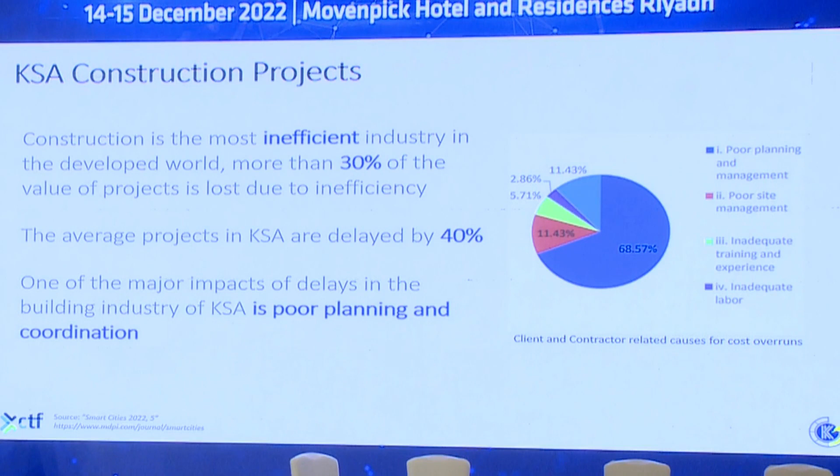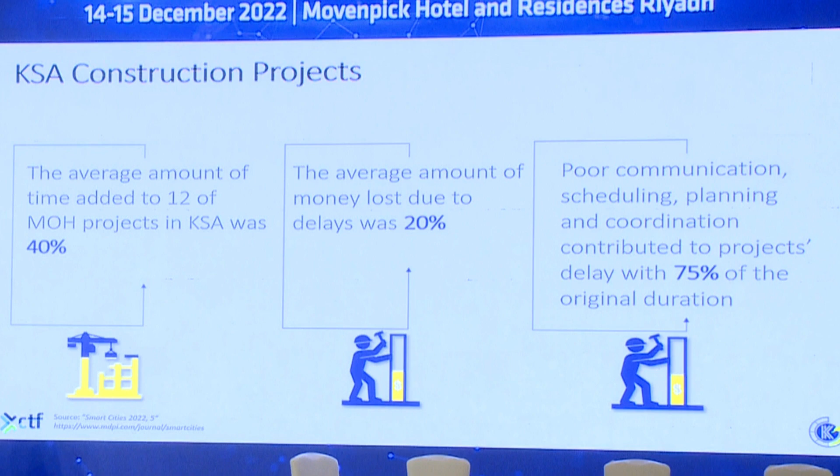According to a study of 47 KSA construction projects in 2022 and 12 MOH projects, rework activities caused delays of almost 40% and money losses of 20%. The major causes of such delays are poor planning, coordination, scheduling, and communication, which contributed to project delays of 75% of the original duration. We are working in a highly fragmented industry, broken down into planning, design, construction, and operations.

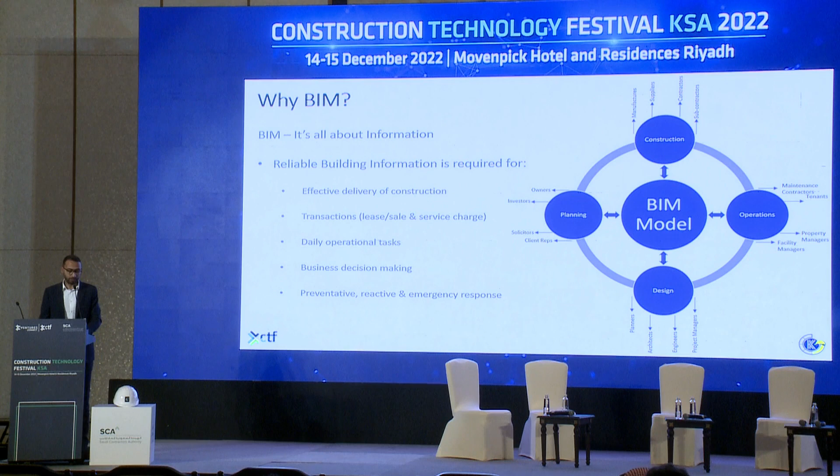And so many project stakeholders are involved in the project with different business interests, which ends up creating a complicated series of transactions of information between all the parties during the project stages, to the point that the collective knowledge of the building information being produced is almost impossible to get, because it is stored in different locations, different companies, different countries, and sometimes in people's minds. This is why the ultimate goal of BIM implementation processes is to describe one building by one database of information.

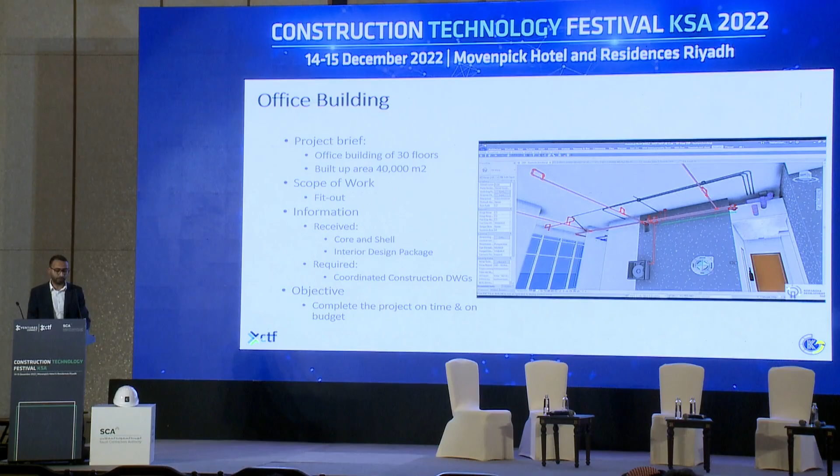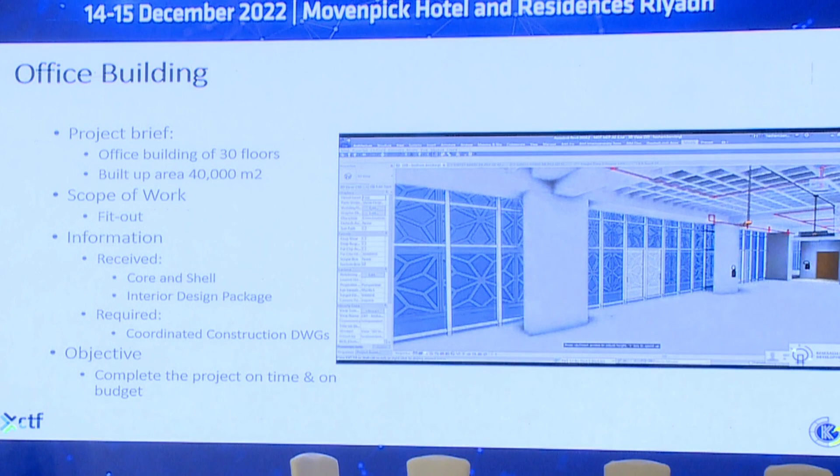The first case study is an office building for one of the ministries in Riyadh. It consists of 30 floors with a total built-up area of 40,000 square meters. The main scope for our company is to do the fit-out works. As a contractor, it's our responsibility to verify the as-built received from the client. We used to do such verification the traditional way: visual inspection on site, take site measurements, update the drawings, check specs, and move forward to the execution phase. However, such methodology puts the project at risk of rework and delays because of human error and the information transactions.

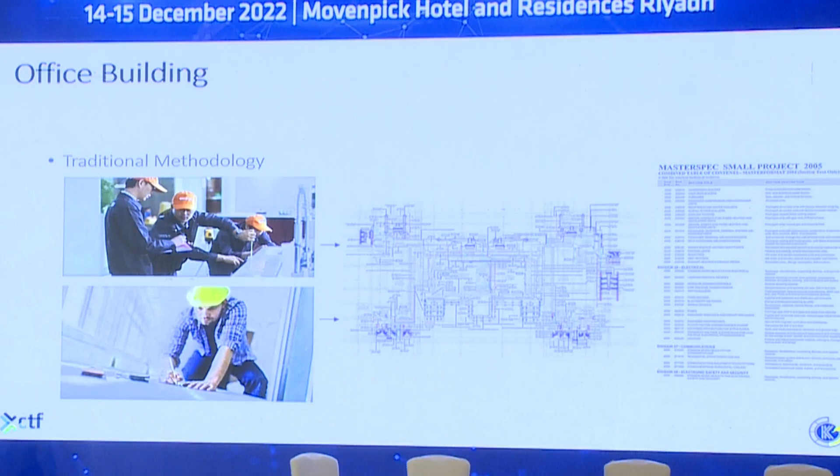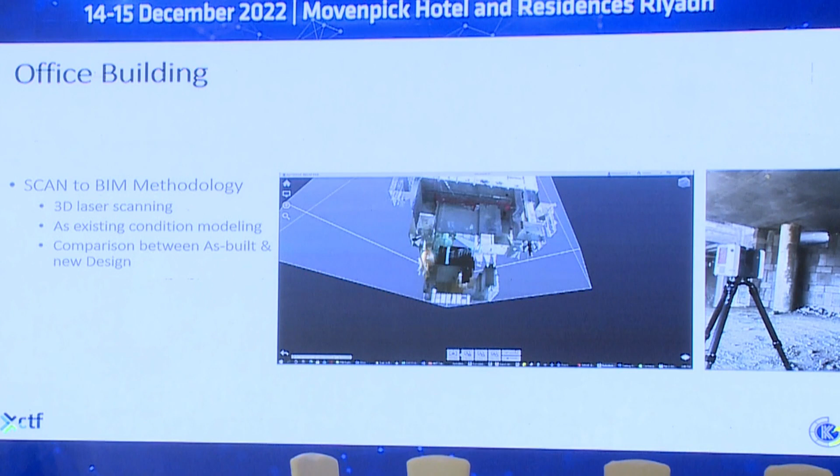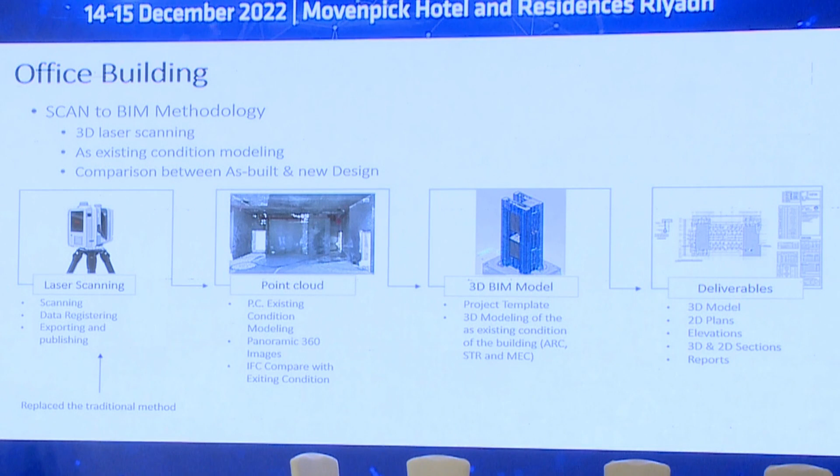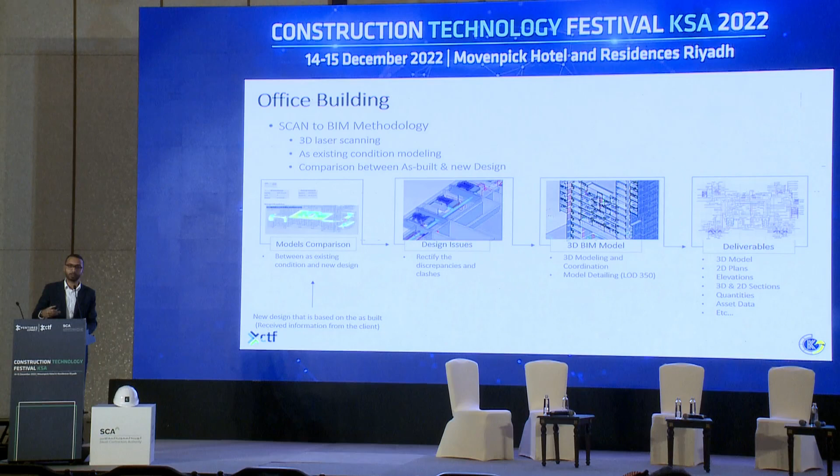The other methodology that we followed is 3D laser scanning, or the scan-to-BIM methodology, in which we conducted 3D laser scanning for the entire building. We utilized the 3D point cloud model and the panoramic images to create a 3D BIM model of the as-existing condition of the building for all disciplines: architecture, structure, mechanical, followed by a comparison between the as-built that we received from the client and the as-existing condition package extracted from the 3D laser scanning.

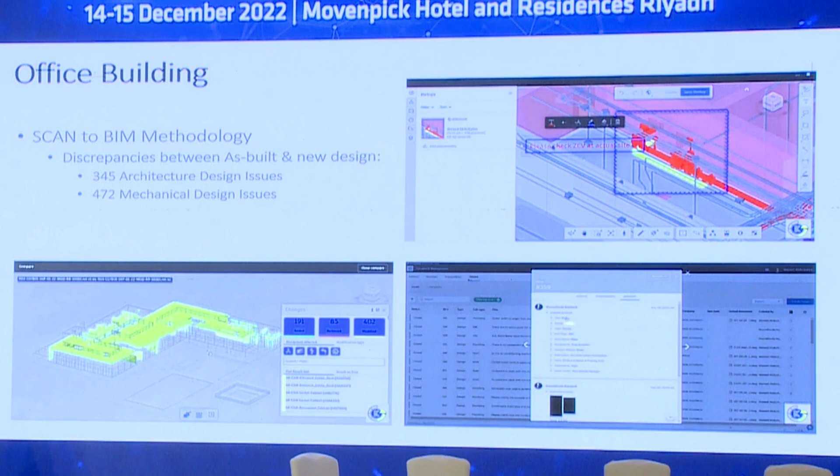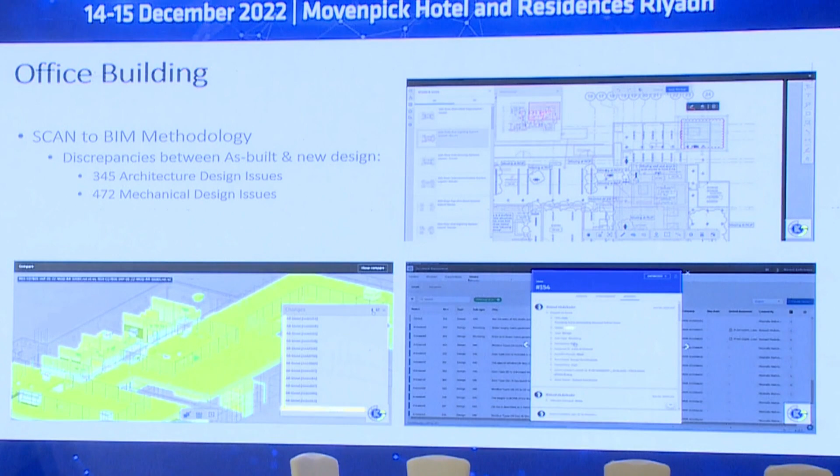We found many discrepancies, and we were able to identify almost 345 architecture design issues and 472 mechanical design issues. Such issues were communicated and coordinated with the client and designer early on through our common data environment, where we managed to connect all the project stakeholders in one single platform. Compared with the traditional methodology, we managed to reduce the rework activities by 26% of the original time. Coordination was enhanced, communication was enhanced, and all the issues were resolved early on.

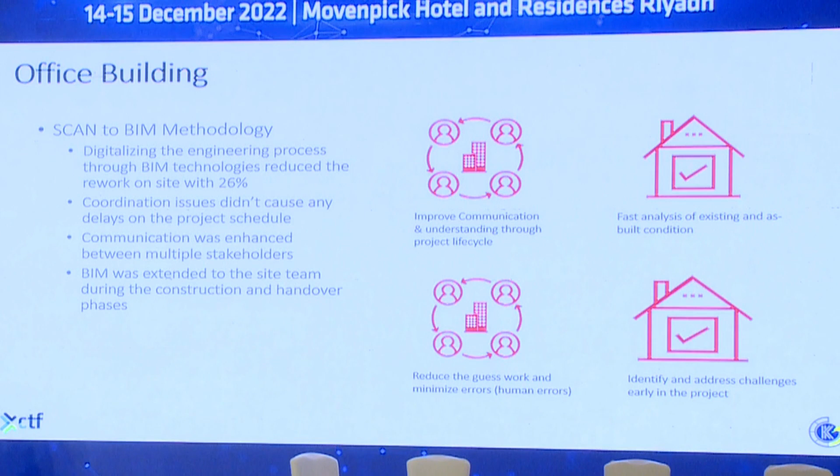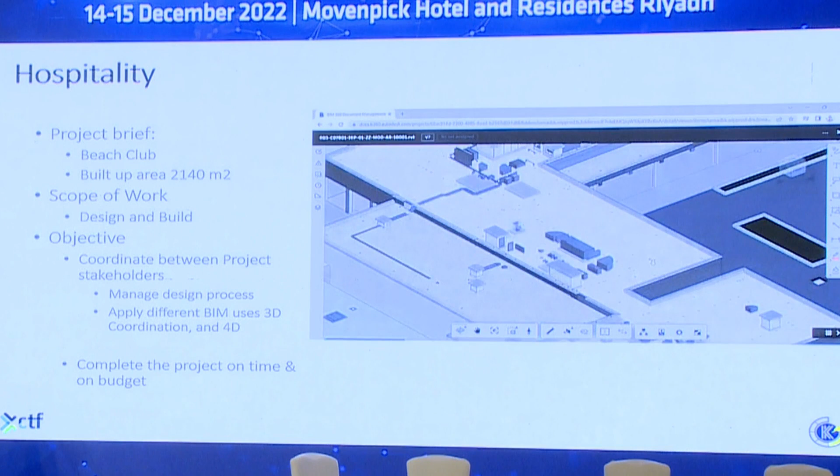The second case study is a hospitality project where the scope of work was a complete design and build project. During the tendering phase, the client requested us to construct the project under the BIM process, which is the optimum scenario for us as a contractor, to have a single platform that connects all the project stakeholders together.

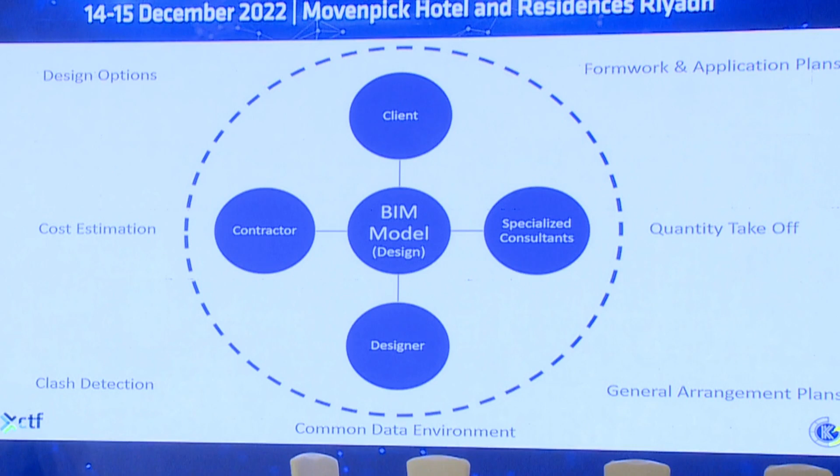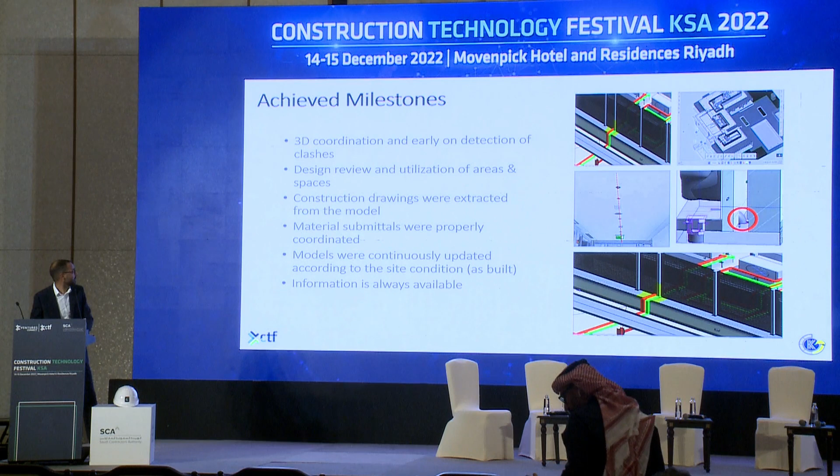When we connect all the project stakeholders together, we were able to carry on with the project phases and activities later on. In this project, we achieved different milestones. 3D coordination activity or milestone was conducted early on during the design phase. Design review and utilization of areas and spaces. Construction drawings and schedules, BOQs, were extracted directly from the models. Models have information always available.

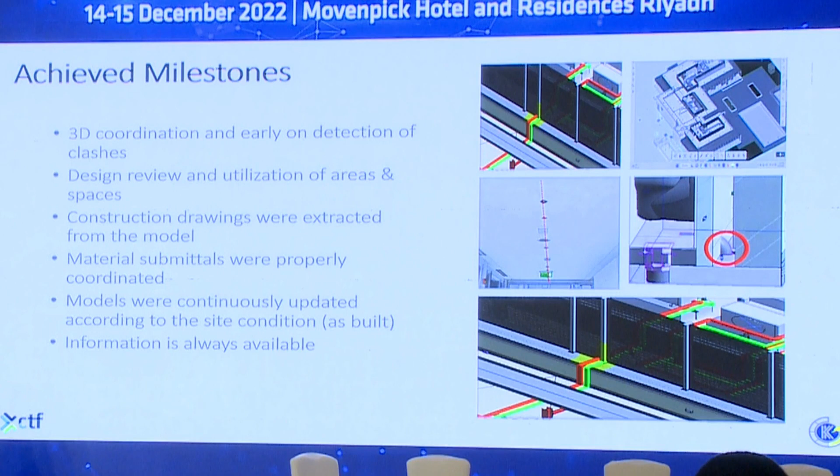And the most important milestone for us was the material submittals and long lead items. This was one of the major points for us that caused delays and rework activities in our previous projects. We faced many challenges in this project. The major one is the supply chain that caused us a lot of rework activities.

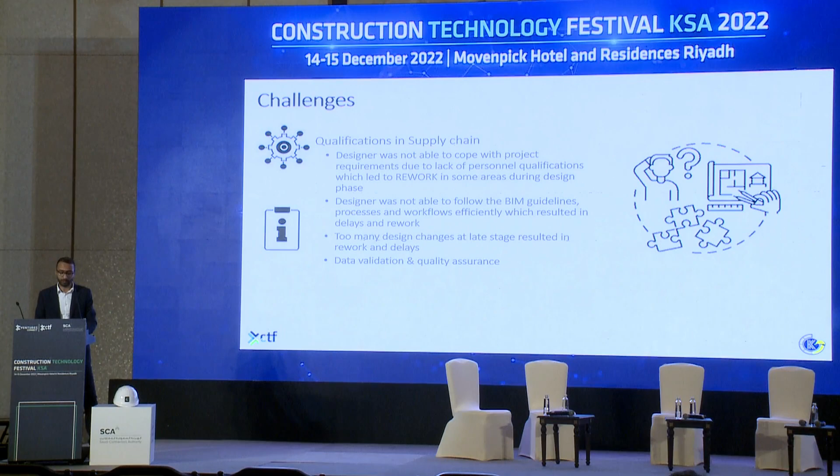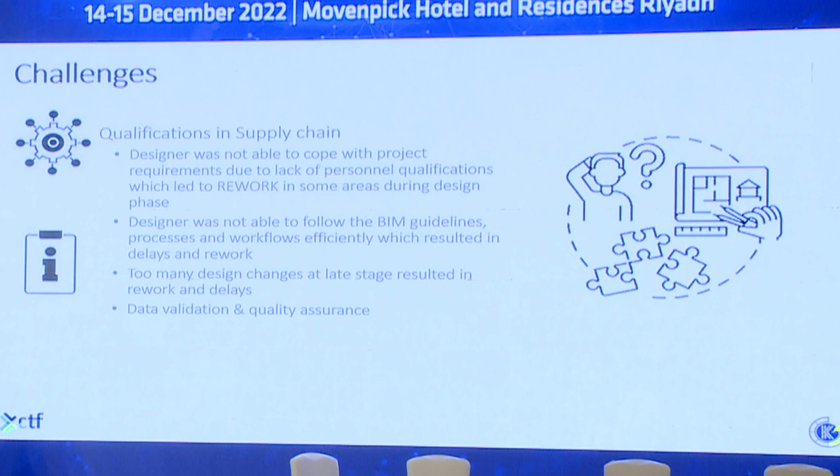Unfortunately, the designer had lack of personnel qualification to meet the project requirements and to follow the project BIM standards and processes. Also, accordingly, the client had also many design changes at late stage of the project, which resulted in rework and stretched the project timeframe.

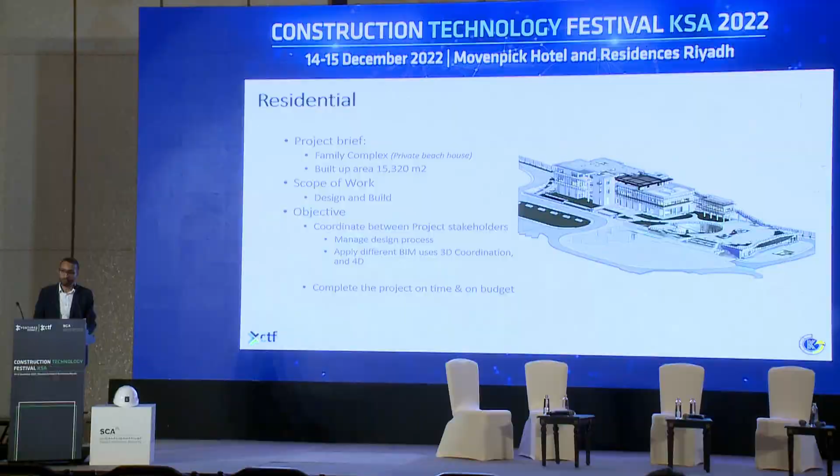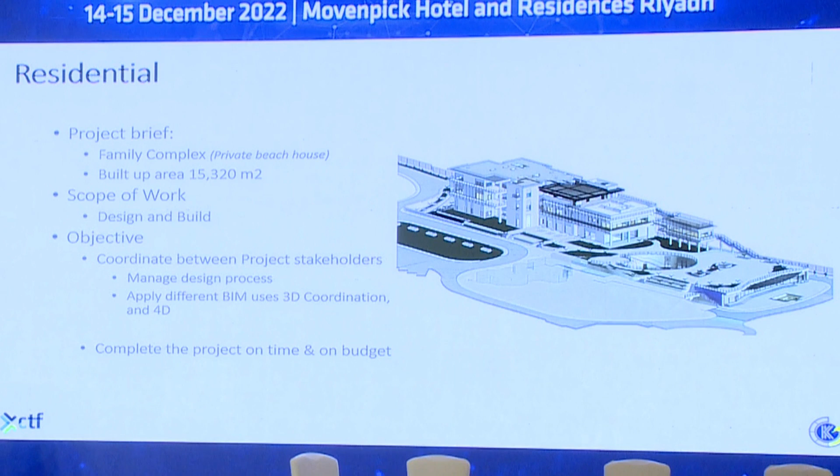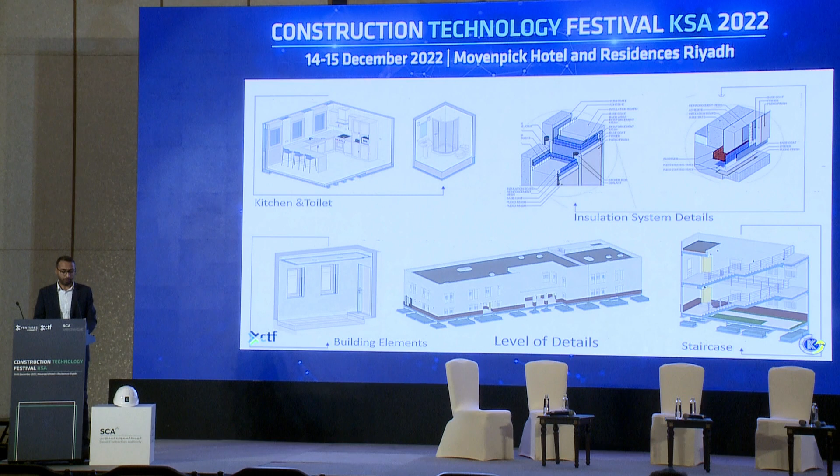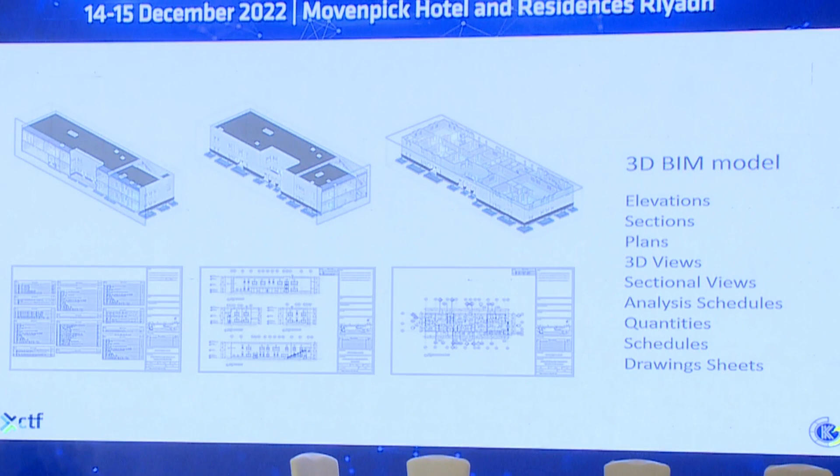The third case study is a private residential beach house project with built-up area of 15,000 square meters. The client suffered almost 18 months of rework in design stage, because of the loss of information or the lack of coordination. BIM was introduced during the design. We implemented and solved almost 345 design issues for all disciplines. We managed to build a 3D BIM model with the required level of details needed to ensure that the model is mature enough to produce a comprehensive, complete set of design package, fully coordinated.

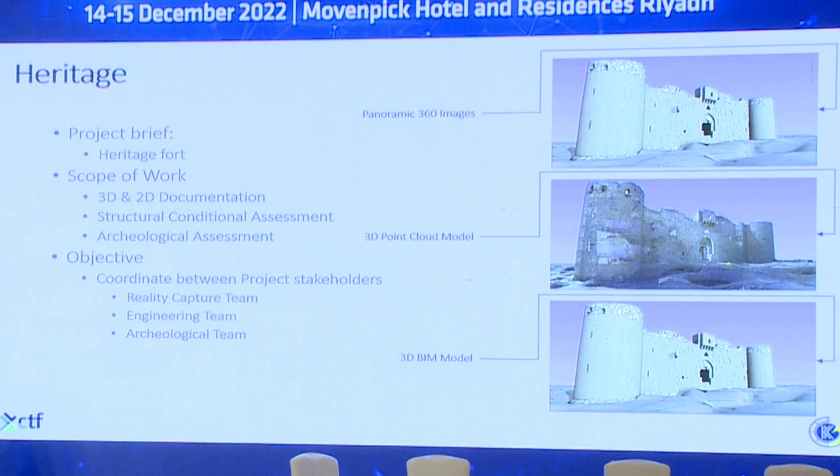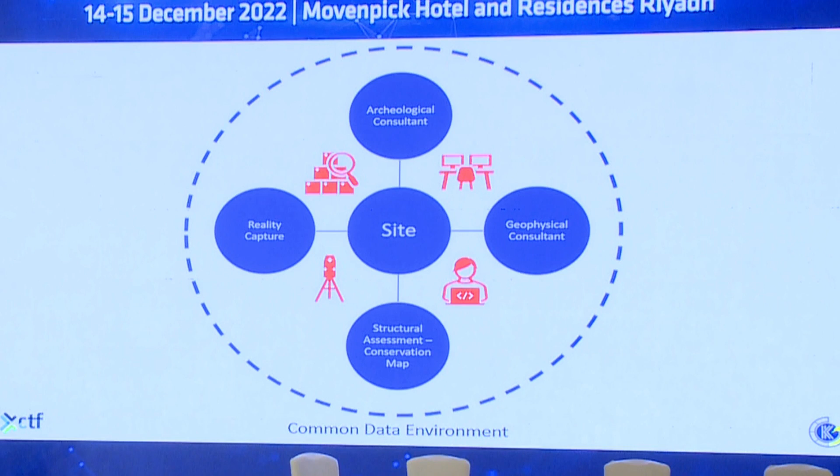Last but not least, the fourth case study is a heritage project. This project was conducted during the pandemic and lockdown. The main objective is to coordinate between all project stakeholders: the reality capture team, structure and engineering team, structure assessment and engineering team, geophysical consultant, archaeological consultant.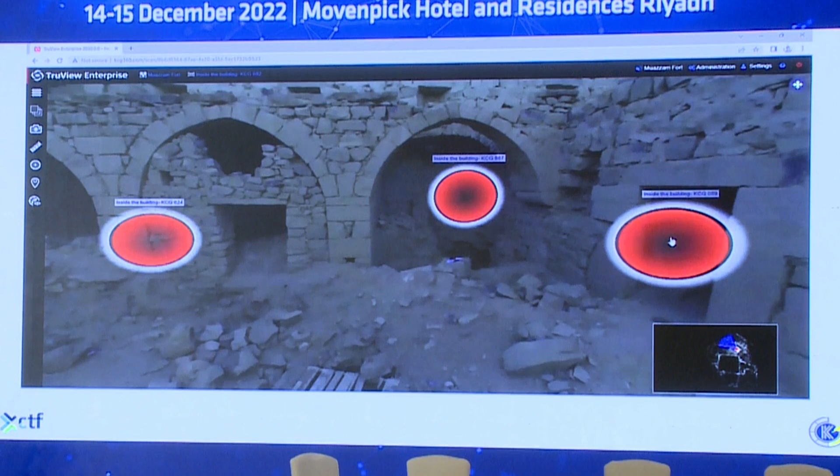We conducted the 3D laser scanning, and after we finished with the scanning, we published the panoramic 360 images on our server. And we gave access to our project stakeholders to easily access the project wherever they are and whenever they want, whether to move from a point to another, to measure a distance, angle, or to take a screenshot and communicate with each other.

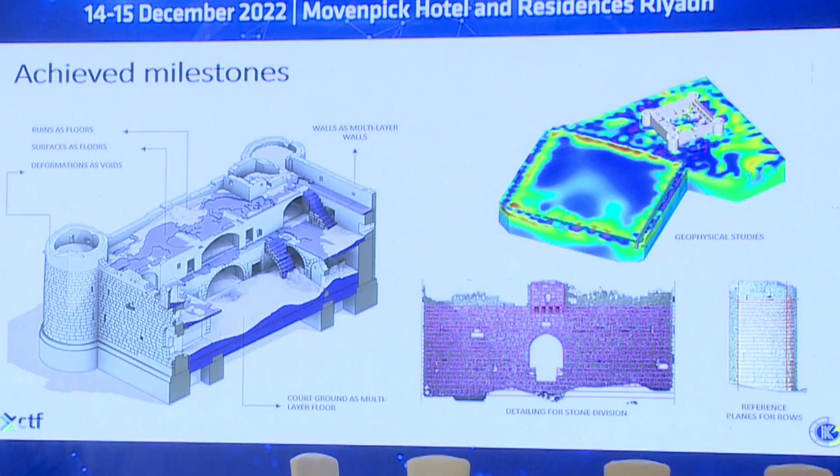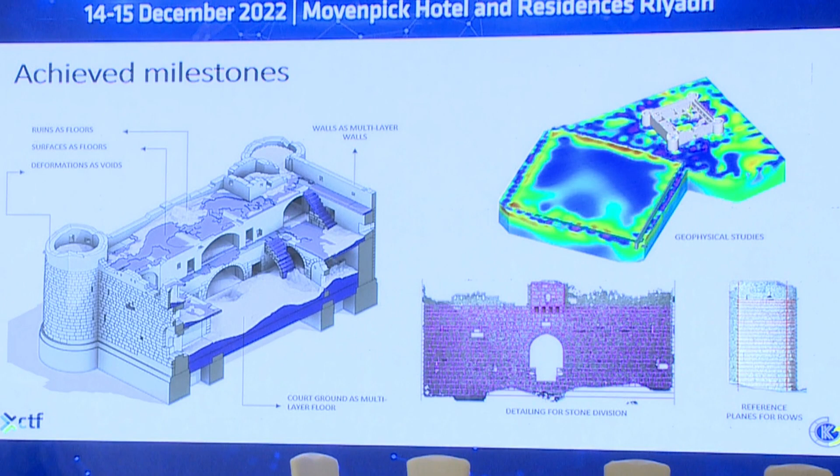We completed the BIM model with high level of details. For example, the stones, we traced each and every stone and we modeled them one by one so that the archaeological consultant can later on carry on with the archaeological studies. We gained a huge benefit from our BIM model for the geophysical studies, where the geophysical consultant managed to integrate his technology with our model to perform the subsurface geophysical analysis beneath the castle.

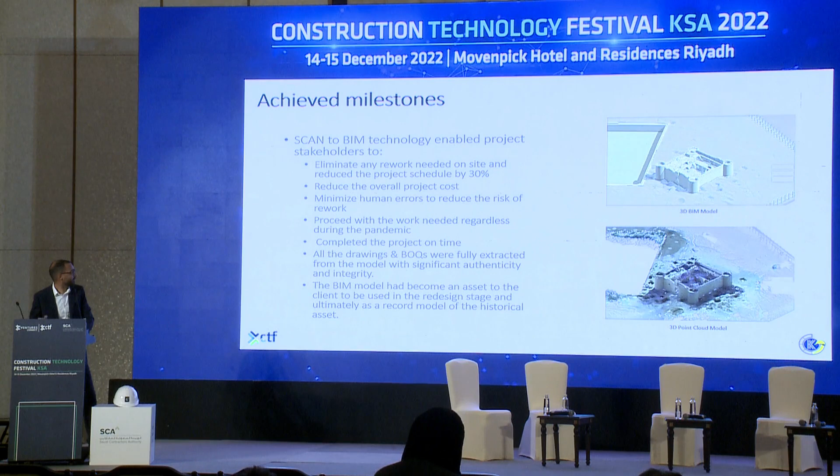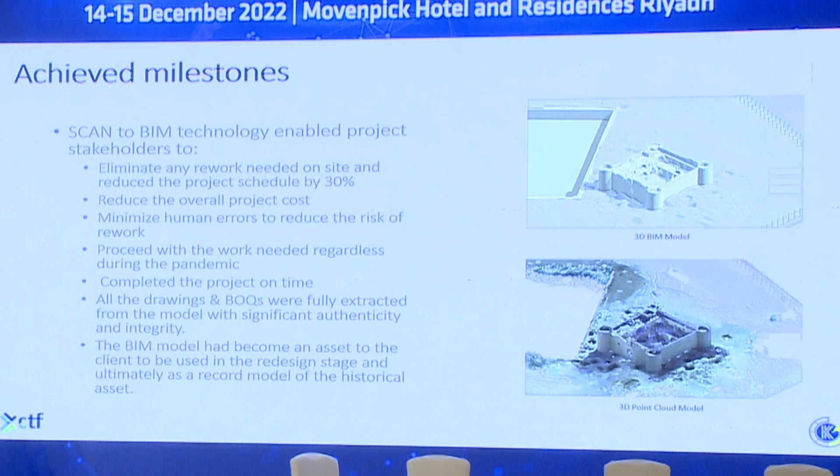We achieved a lot of milestones in this project. We reduced the overall project cost, minimized human errors to reduce the risk of rework. In fact, we eliminated completely the rework on site. We were able to complete the project 30% earlier than the project schedule. All the drawings and schedules were fully extracted from the model. The BIM model had become an asset to the client to be used in the redesign stage and as a record model for the historical asset.

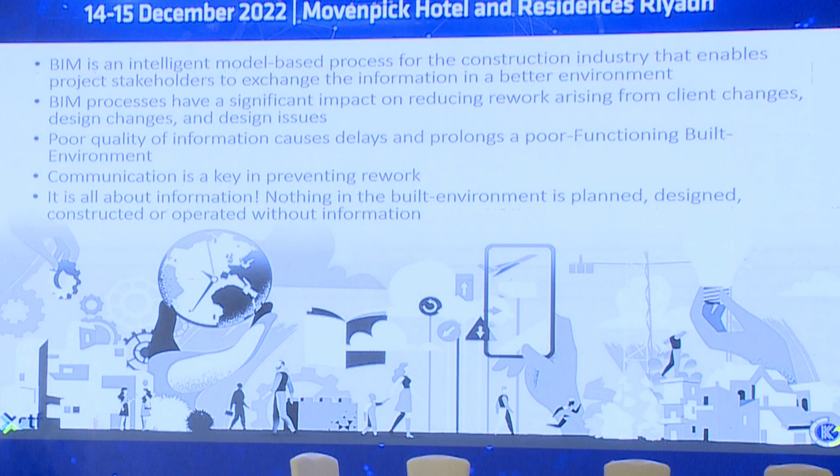BIM is an intelligent model-based process for the construction industry that enables project stakeholders to exchange information in a better environment. It also has a significant impact in reducing rework arising from client changes, design changes, and design issues. Poor quality of information causes delays, and communication is key in preventing rework. It's all about information. It's all about one single source of information. Nothing in the built environment is planned, designed, constructed, or operated without information.